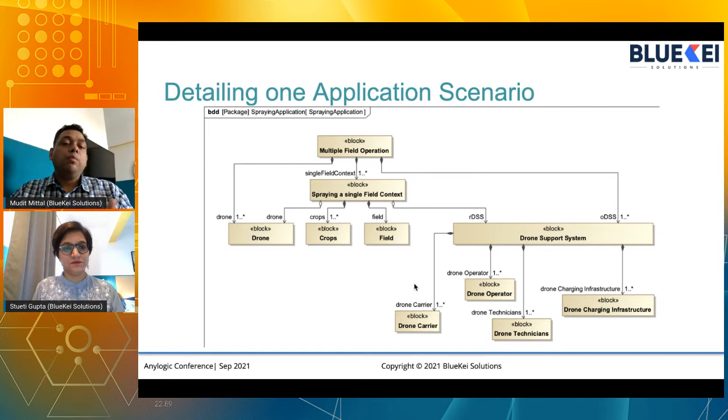What we want to observe is how the overall behavior emerges. This is a real conversation depicted in a SysML diagram, wherein the drone application contractor wanted a huge number of drones from the drone manufacturer. However, the drone manufacturer, also an internal stakeholder in the decision, said he cannot supply so many drones because they'll be sitting idle. What we want is complete utilization of the drones, so how can you optimize that? These are the kind of tussles that happen between stakeholders, and there could be more.

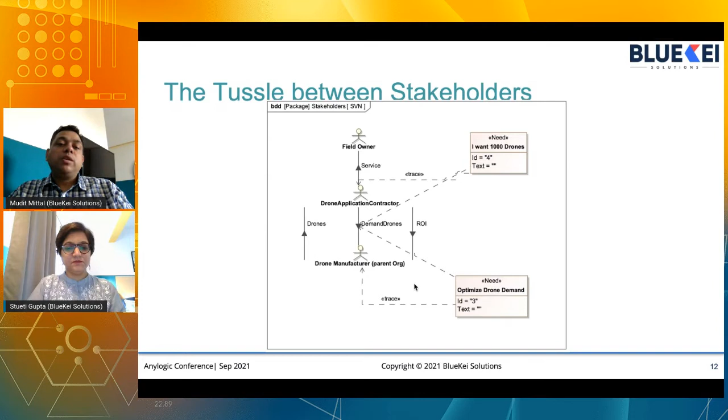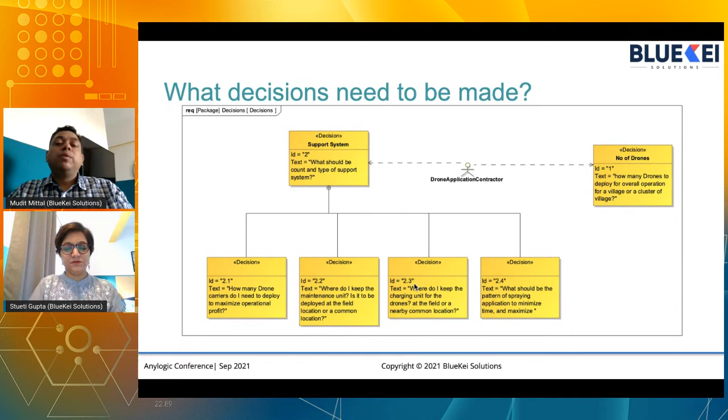What we wanted to see is how we can use AnyLogic or agent-based modeling to come up with a solution. There are other decisions that need to be made, for example around the support system itself: what should be the count and type of support system? How many backup batteries do I need? How many drone carriers do I need? Do I need a drone operator or technician always on the ground, or can that technician move around as required?

All of these things will depend upon several factors, for example the field size, the type of application, how far the field is from your base location, which also tells you how many base locations you need. Then you can decide how many drones, or the type of drones you need. There could be several types of drones with different performance characteristics and load carrying capacity. So all these variables come into the equation.

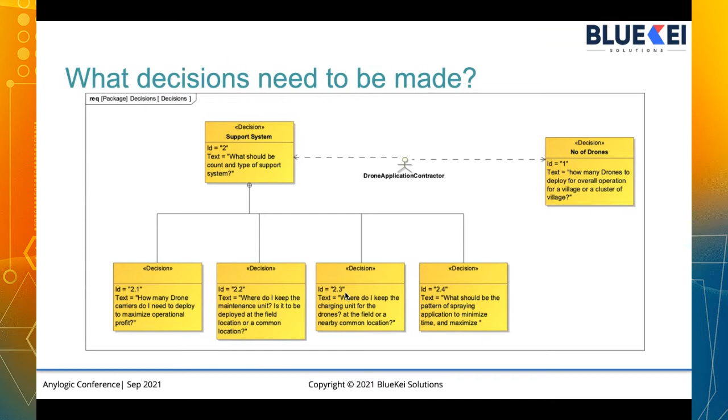The approach we took was to start identifying the key architectural decisions at the system of systems level, which were the things I explained before. Then try to build the dependency between these stakeholder decisions, model the behavior of individual systems, and try to understand the emergence. That was the overall approach. Now I'll go deeper into the actual model.

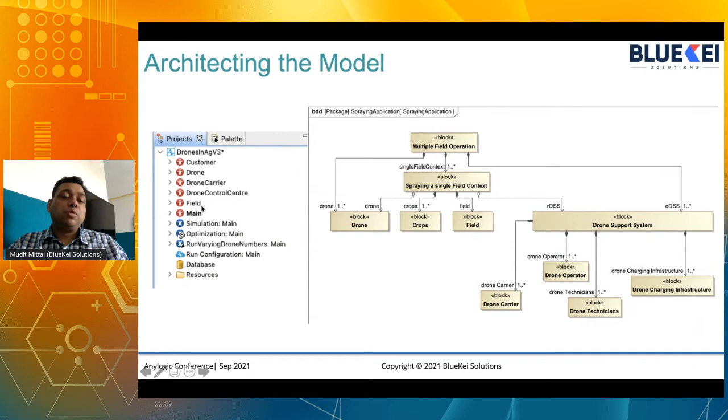What I have here on the right is the SysML diagram I explained, and on the left is a snapshot of the model in AnyLogic. You can see a parallel between the agents or classes we have and the blocks or classes in SysML. For example, I've created a drone carrier here. Drone control center is a central controlling agency that allocates drones to the field, deploys them, controls the queue, and then of course there's the field and the main agent.

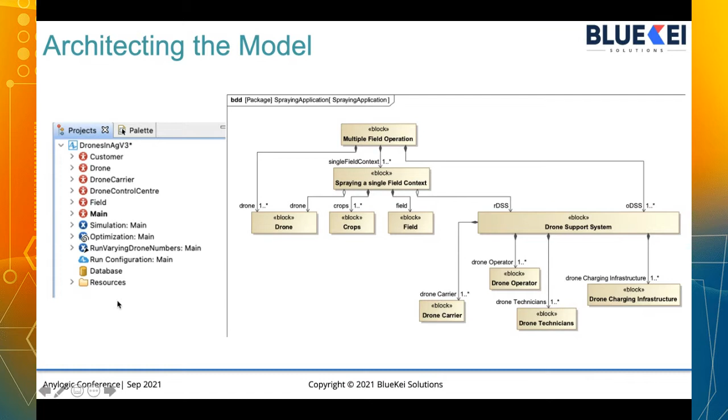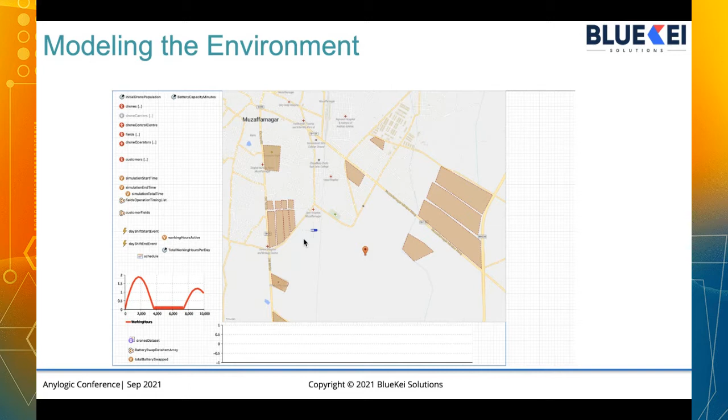Then we have the land coverage per minute, which depends on the application and type of drone. And how long does a battery last? Instead of taking ampere hours, we've taken how much time it lasts for that particular application, to keep things simple. Basically, a drone waits till it receives an instruction to get deployed.

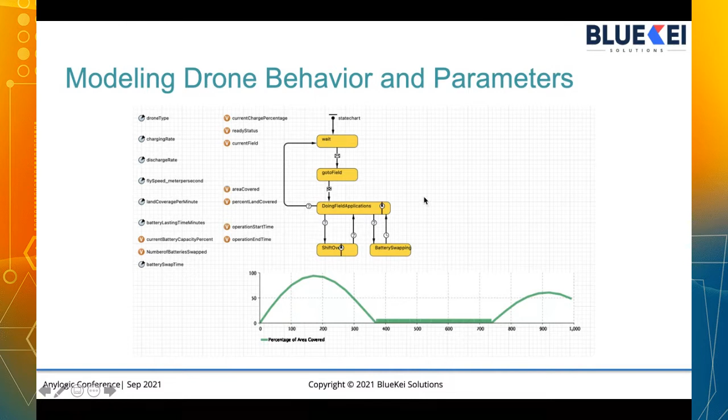It goes to the field through a carrier, and then does the drone field application. Then there are two different states it could go into: one is the shift getting over, so it goes idle, or the battery is being swapped. We could also model a third condition of a breakdown, or maybe a depletion of the spray content. So all those scenarios can be modeled using the states here.

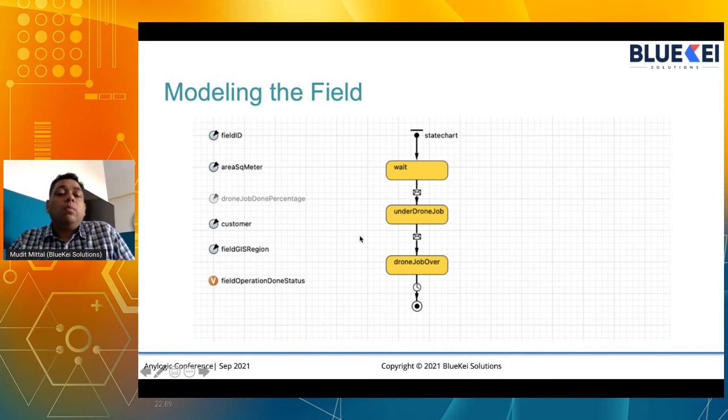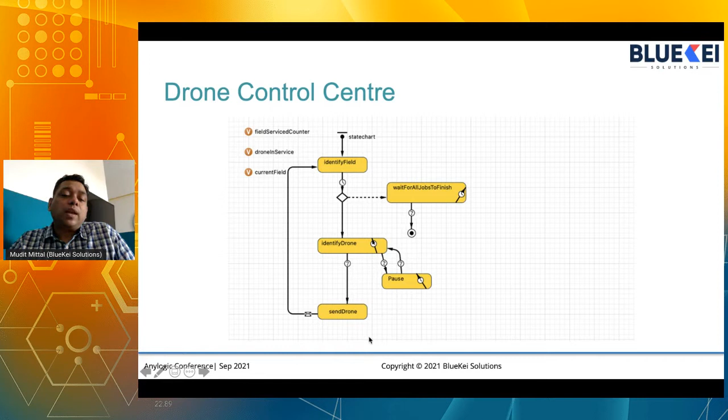Another one is modeling the field itself. Right now what the field agent is doing is just getting the drone job done and tracking how much field area has been covered. Finally, the drone control center is the one creating the decisions, and over here are the decision points. It also goes into pause mode once there's a night shift, and then keeps sending the drones as the queue gets clear.

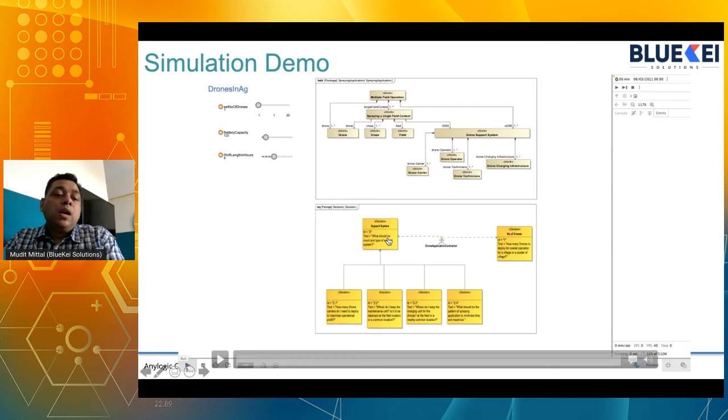So with that setup in mind, I would like to show you a quick demo. In the demo, what we have... sorry, I'll just go back.

So in the demo, what we have is right now we have configured three parameters: the number of drones, what is the battery capacity, just to see how it would impact the overall duration, and what is the shift length. This might get varied based on the time of the year or what the contract is that you have with the employees. So on an average, we have taken 8 hours per day.

So right now, this simulation that is running with a single drone, and this will show you how much time it is taking overall to complete the simulation. The simulation time is running in minutes. However, on the right, we start getting a lot of debug messages about what's the current situation.

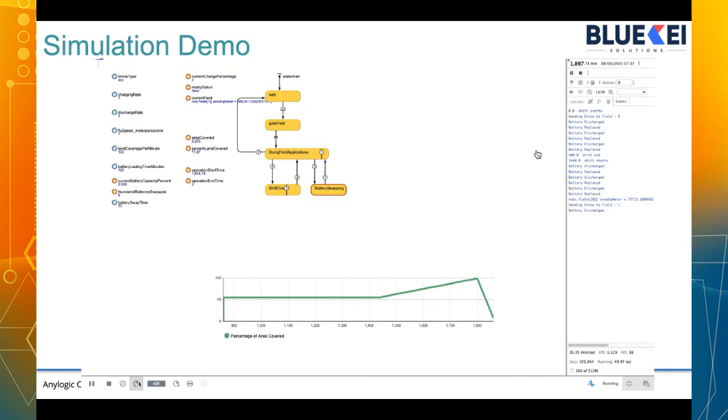So right now we can see that the application of the fertilizer was constant, and then it has gone into a shift over, so basically it's night time. We are also tracking the shift over here, so we'll be able to see how many days have passed. And we are also able to see on the right how many times the battery has been discharged. So basically what we are assuming is there's a battery pack, and every time the battery gets discharged, a new battery is swapped, and that takes about 10 minutes to change. So we are tracking the number of times the battery has been changed and the number of days that have passed here.

Okay, so just to speed it up a little. Now we are running at a higher speed, and we can see it takes about 41 or 42 days to complete this. About 198 times the battery was replaced with a single drone application.

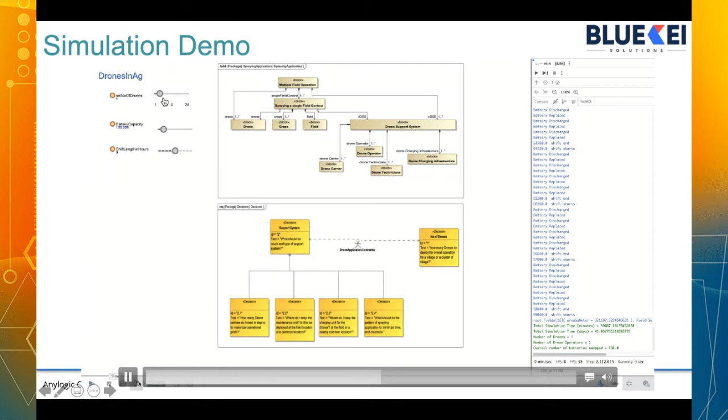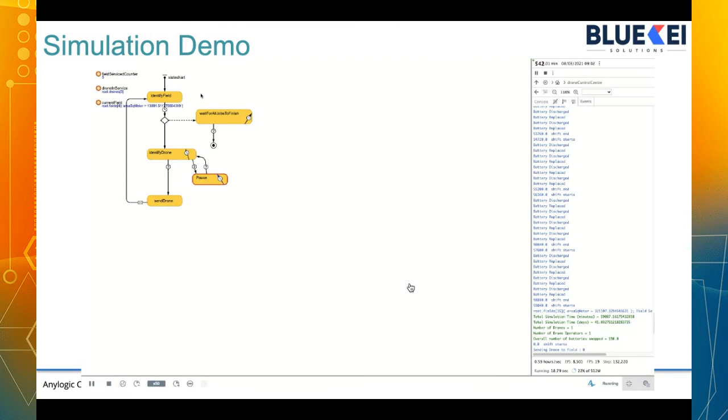And over here, we have changed this to, let's say, maybe 9 hours and number of drones to 4. And then how much time would it take to really complete the overall operation? Now, what we have here is that the drones are being sent in a sequence to the number of fields, and that sequence has been pre-decided. What can also be done is that we could change that sequence dynamically based on the location and what is the most optimal path.

Okay, so I'll maybe just quickly go ahead. Okay, so it takes about 10 days to complete this simulation.

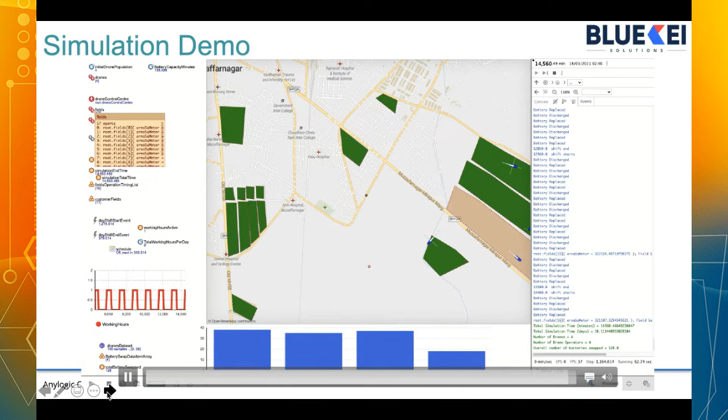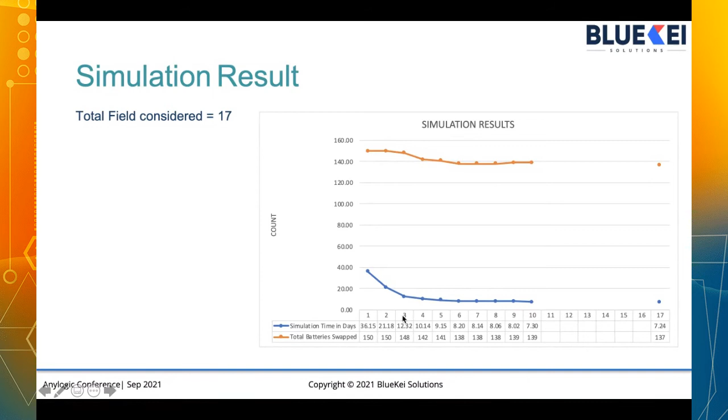So now what I would like to share is some snapshots of individual simulations, which give you a little bit more insight into what we learned by running these simulations. Now, one thing that came out straightforward was that the number of days would vary depending upon the number of drones. However, one thing that can also be observed is that the number of times the battery is being swapped per drone also varies by where it is being applied.

So let me quickly run it through. So when we are running 2 drones, one drone is working pretty hard and the other one is a little less. If we look at it further, the distribution is pretty different. So 2 drones are working to their full potential maybe, and this one is not being utilized completely. It keeps on changing as we keep on increasing the number of drones.

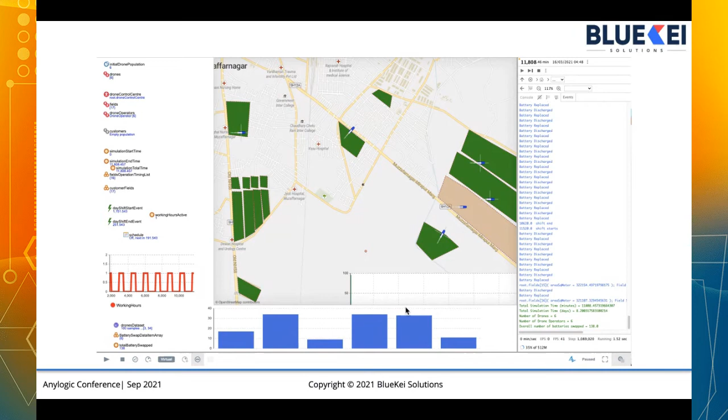So what can be observed from this is that we need to optimize even not just maybe the number of drones. What we also need to optimize is the path that they follow, and when and where should they be sent so that they are fully optimized. So those are a few learnings.

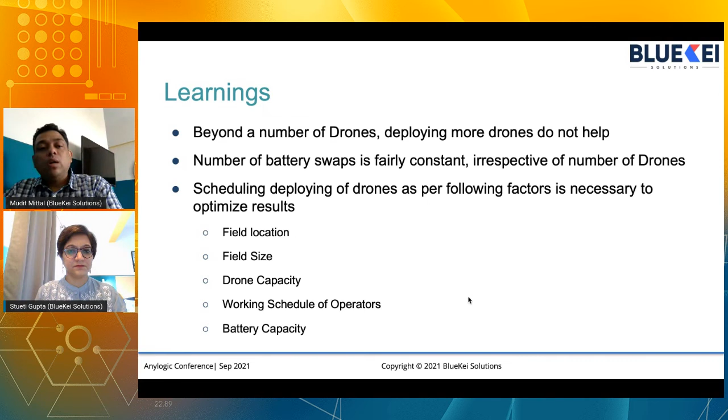Now, a few challenges we'd like to share, and our approach. If you look at the battery life and the projection of battery swaps, that is a complex, high fidelity model in itself, because with life, the hours that we work in are...

I think there is a blip in Mudit's internet connection.

So taking on from here—as you saw in the context of the model, the accuracy will increase when we have a more detailed GIS survey of the space we are evaluating the application for, especially intra-field if there is a requirement. There's also a need to add fidelity related to the type of spraying required, because the payload will impact the performance of the system itself.